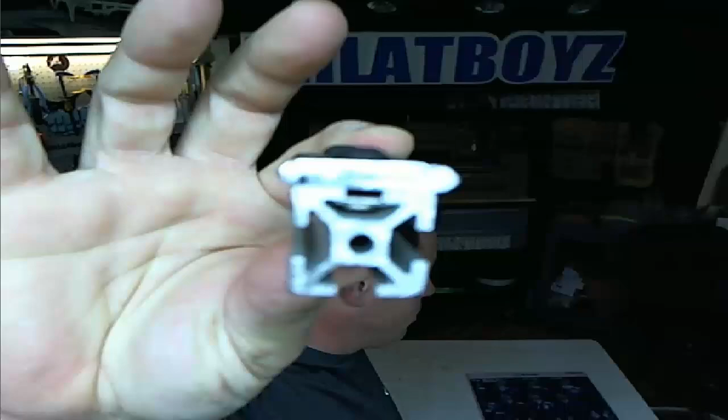I would imagine that you all know, but just in case you don't, we had a Kickstarter going for OpenRail. OpenRail is a linear bearing system, that's basically what it is. For you guys that don't know about it - this is actually a little sample piece, but it bolts to existing extrusion. This is what it looks like if it's doubled up. We have ultra low head screws that are going to go on here, they're still coming in, but this is basically what it looks like. It gives you the ability to run V-groove wheels on your builds, any kind of builds you come up with, for T-slot aluminum extrusion.

So it creates an awesome gantry system. We started a Kickstarter because there is upfront investment to get the die made and get the minimum order placed. So $4,900 was our goal, and we ended at 819% of that goal. Oh my God, we had 200... I know, we had 263 backers for a total of $40,140. It ended on Sunday night.

To be honest with you guys, I didn't think OpenRail was that cool of an idea, but it was one of those ideas where the more you worked with it, the more you're like, you know what, it can do this, you could do this with it, you could do all these things with it, and it just really became useful. I was like, man, this is actually really cool. We gotta share this. This is one that we attached to - you can see the black rails here are OpenRail.

Oh, everybody's lost video. Oh, they did? Yep. Is it back?

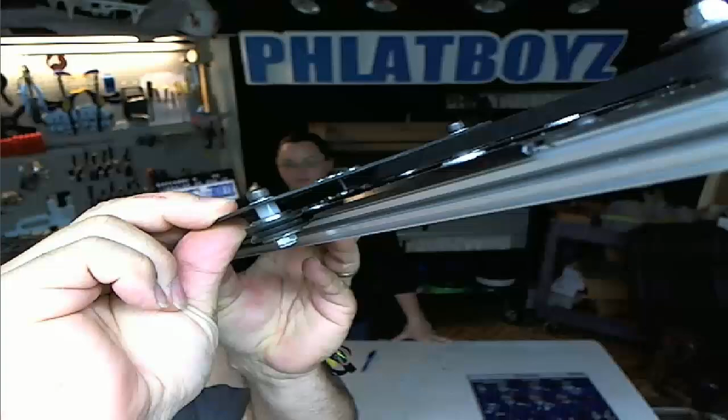Okay good, this you guys might have seen a video. Terrence Tam of Open Beam contacted us with this extrusion that he came up with, that he started on Kickstarter. It's awesome, man. He's got motor mounts for it and everything. He basically overnighted us this because our Kickstarter was about to end. He was like, you really need to show the guys that Open Rail is compatible with it. So I put this together really quick. It's just a little linear actuator. This will give you a better idea. The black part is the Open Rail, and you can bolt it on. I sort of have it bolted on there, and then you can see the V-wheels riding on the groove there. So it's cool, man, you could make all kinds of stuff out of it.

Honestly, first off, we want to thank you all for supporting our project, and absolutely all of our projects, for all of your support. Open Rail exceeded, by far, our wildest dreams. We were like, well, we really want to have Open Rail. We got a rough estimate of how much it's going to cost for the die and everything, and we're like, even if it doesn't make it, we'll go ahead and pitch in whatever it takes to get it out there. Now it's like, now we can get plates made, we can get more accessories. It's going to be awesome, man. This really kickstarted this whole thing, just like it should. Yeah, it did, I mean we're just blown away, guys. Thank you so much. It's just, you guys are awesome.

It's awesome. So now we're working all the time on the details for the Open Rail. You might think, it's an extrusion, how hard could it be? But there's so many details. So that's what we're working on. We have a couple samples coming, or at least ordered. It actually requires two tools, because you have to have the tool that punches, a rotary punch that punches out all their oblong shaped holes for the mounting, so that it can mount on different size extrusions. So it's really cool, man.

And if you guys haven't seen, you can get all kinds of different types of extrusions. This, I showed it I think on the last show, but this is a really nice extrusion. I've got stuff bolted to it, but you could imagine this is on the side of your CNC. Actually, I was experimenting with bolting the wheels right onto the extrusion. I thought if you had a little piece of extrusion, you could have 4 wheels on there, and then that would be your carriage that you could bolt other things to the front of, which I thought would be really cool. Just have to figure out a way to adjust them when they're on there. Maybe just put the plate on there and hang these two over so you can use the eccentric bushings. I don't know, but anyway it's really cool. There's going to be so many things you can do.

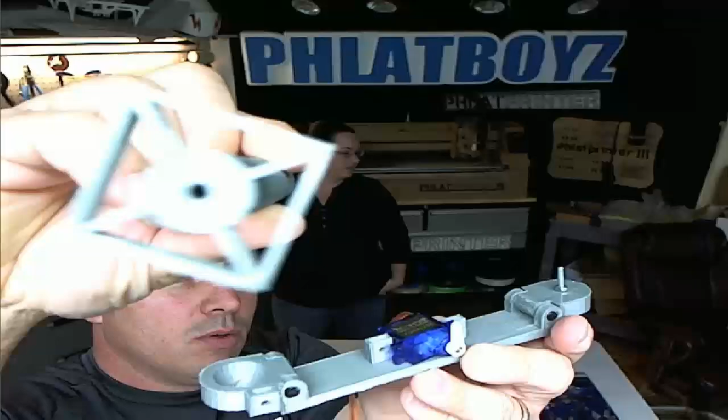66 T-Birds method. Yeah, so glue sticks, you can see this. All this is for right here is to put the wire through from the servo. I don't have anything bolted on right now, but what happens is the servo would open this flap, and then this would be able to tilt, and then this would come off upside down. Of course it has a hole in the back, and I'm redesigning the whole thing because I didn't make this.

This was a guy over at Thingiverse that made this. But the problem with it is it didn't have the cup in the middle like it should have here, and it didn't fit the servo properly. So I'm remaking it a little bit, but it's going to be awesome. Now, what he did was he didn't use a screw, which I did, and I tried to sand the edges of the screw so it would slide off easy. He just pushed a rod through here, and it held, and it slid right off. So I might have to go with something like that. This is all I had laying around, but I know it drops because I've tried it.

There it is. He also put a spring back here, so when you press this on there, it's under a little bit of pressure, and then when the servo's holding it closed, it'll be nice and tight. It's supposed to press this tail fin up against here. But anyway, that's the start of the bomb drop project, which will be awesome, and we'll be sharing those files when they're complete - still have work to do on that one. Turned out cool though. It did, but my newest project I wanted to try was the...

I'm not even going to say it again.

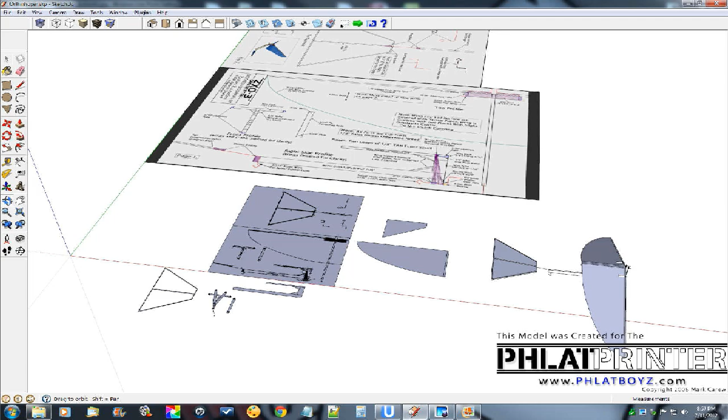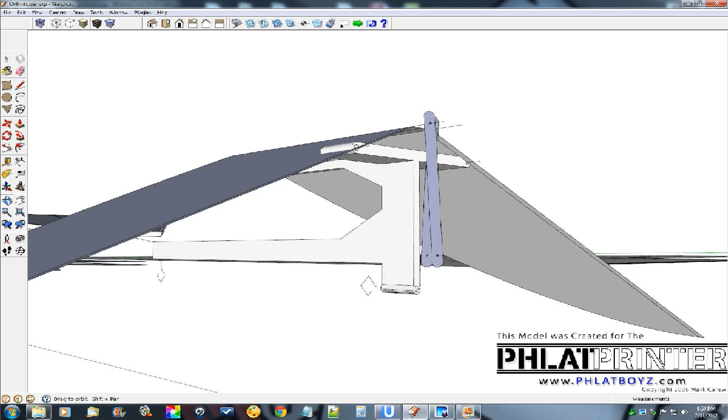Sorry about that, guys. Anyway, what I was saying was these are the PDF plan sets that I found online, and I'll have the link and everything posted with it. Here's a rough picture of what it looks like underneath. It seems simple enough, but it took me forever to design this, believe it or not. The plan is to actually print it out using plastic. Here's the two arms, and the crank's just bent wire, and of course a rubber band was stretched between the two squares or diamonds there.

And I just hope it's going to be light enough. I'm going to try to use different densities for the plastic infill, and I might end up taking this whole back section off and just put a circle here so we could use a piece of carbon fiber tubing or something back here.

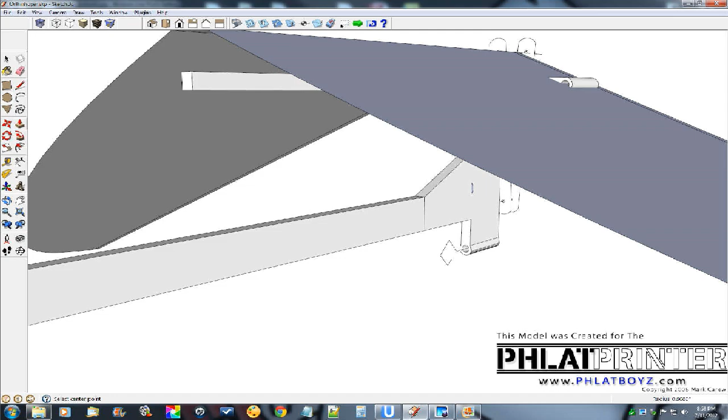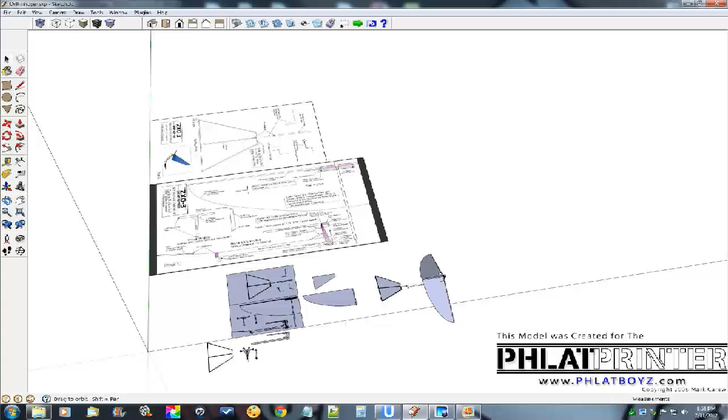Run that just to keep the weight down. So that would be your body going back, probably going back to this. The only thing is you have to have a wire back here because you have to tilt this tail section according to the plans. You can see here he's got it tilted up. I tried to get the right angle. So if it's too heavy with the plastic, I'll probably switch it over and just put one thing of either bamboo or carbon fiber or something.

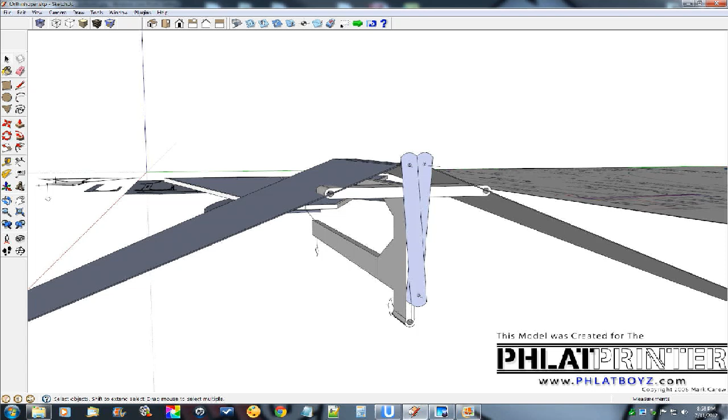But anyway, I thought it was a cool project. I've been wanting to build one of these for the longest time, and maybe after I find out how the principle of it works and I can study it a little bit, we can get into building one that's actually powered and controllable, like the Park Hawk.

So that's the plan, man. That's what I'm going to work on tonight. And hopefully if you guys hang out, you can see it printing. I don't think it'll take too long to print. It's not that much, really. So we'll give it a try.

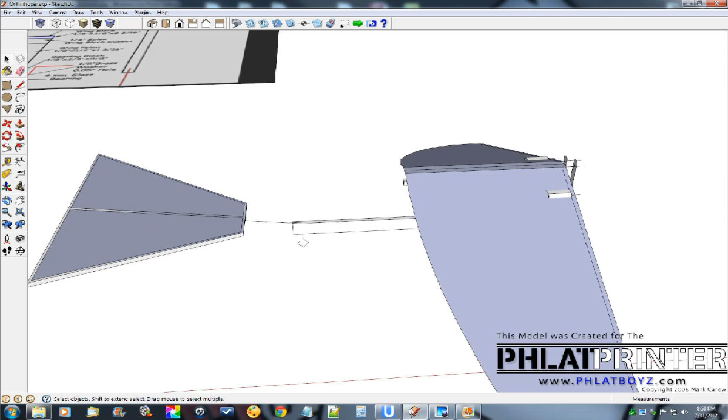Sounds good. All right. Well, Trish just threw a pizza in the oven because we haven't eaten yet. And so I guess that's what we're going to do.